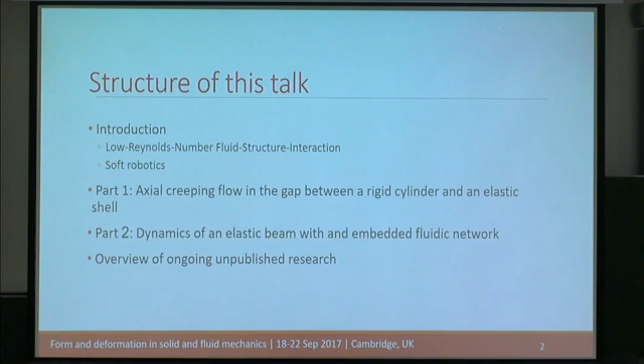In the last part, I'll present some ongoing unpublished subjects and ideas that I'm working on.

Let's assume you have a problem involving a fluidic domain and a solid domain. All of these configurations are governed by conservation of mass and the Cauchy momentum equation. For a fluid, assuming it is Newtonian, you substitute the Newtonian constitutive relation and get the Navier-Stokes equation. For a solid, assuming it's Hookean, you substitute the Hookean constitutive relation and get the Cauchy-Navier equation.

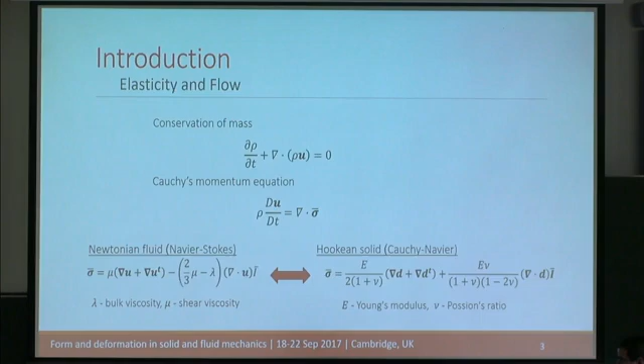So it is clear that for solids, the stress is a function of the deformation, while for fluids it's a function of the velocity, which is the time derivative of the deformation. Thus we get a new time scale: the viscous elastic time scale, proportional to the ratio of the viscosity of the fluid and elasticity of the solid.

This time scale defines the viscous elastic transient dynamics, and in general these problems are governed by some sort of parabolic diffusion equations. It's interesting to know that you can get in these systems very fast creeping flows.

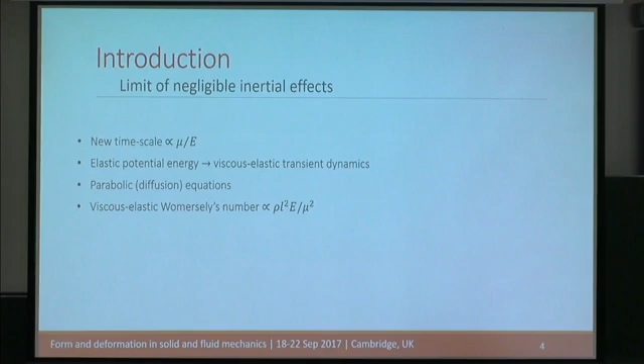You can see here the relevant Womersley number. So if you have a very viscous liquid and a very stiff structure, viscous elastic dynamics can in fact be very fast while still keeping creeping flow.

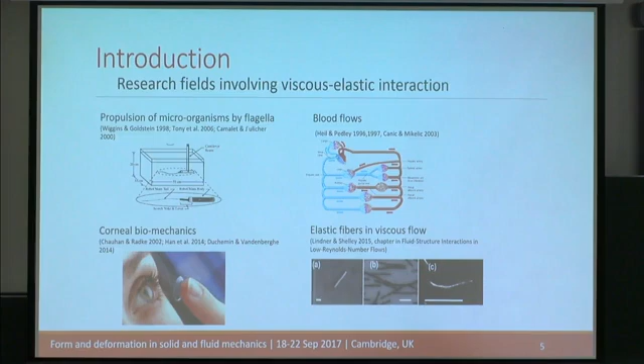Viscous elastic dynamics is relevant to many fields of research. The two most prominent ones are microswimmers as well as blood flows. There are other studies in biomechanics.

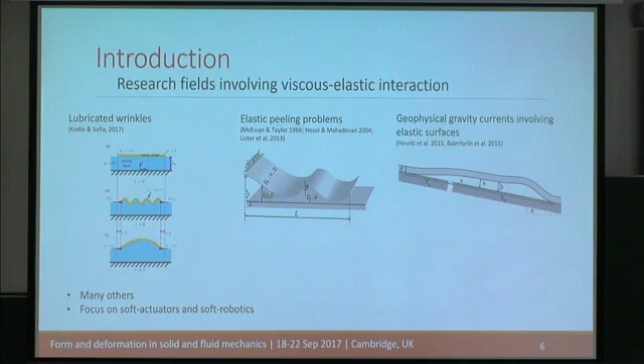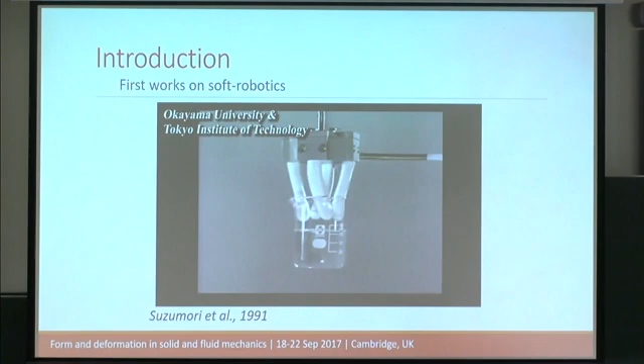The first works on soft robotics were done by a Japanese group headed by Suzumori in the early 90s. They actually did very nice experimental results, and these actuators are operated by pressurized fluid, but it didn't catch on.

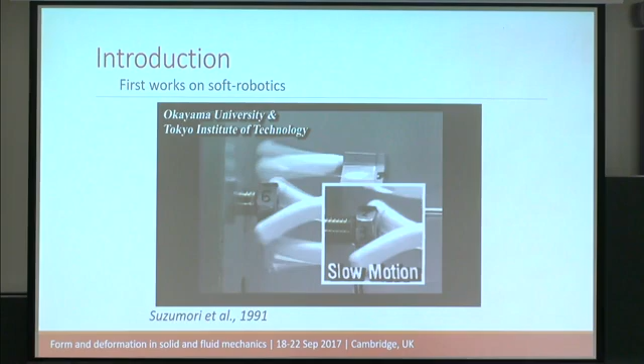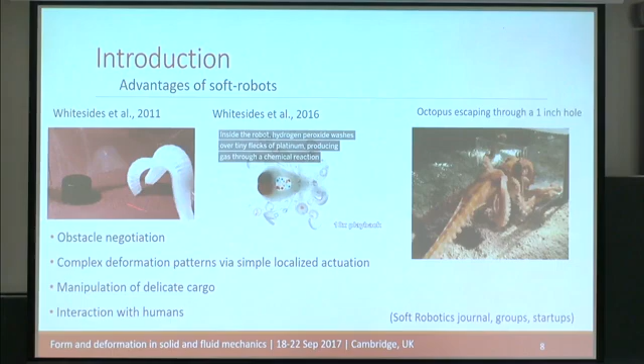There was no interest in this field until a few years ago, when Whitesides started working on the subject. You can see here, I think, the first work by Whitesides showing a soft robot.

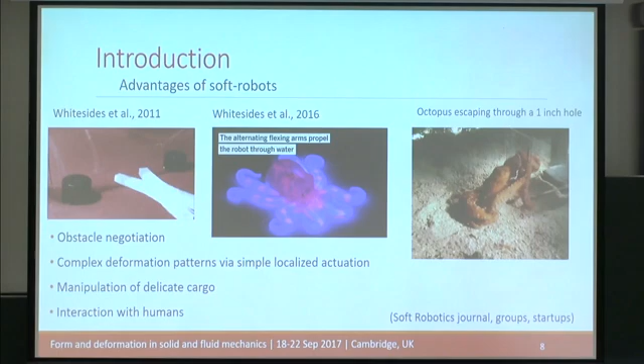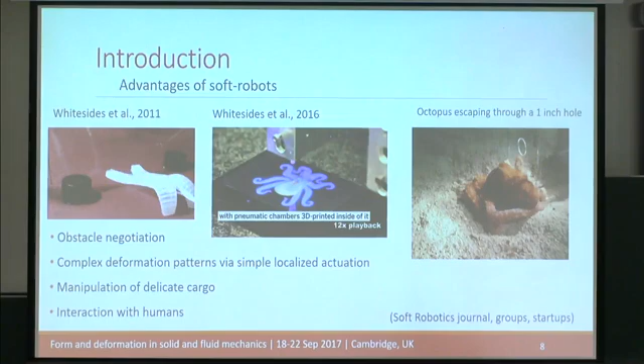This is a more recent work by Whitesides' group, where you have a soft octopus-like structure with complex interconnected channels and chambers, and actuation is done by a chemical response which increases the pressure of the fluid, thus deforming the solid.

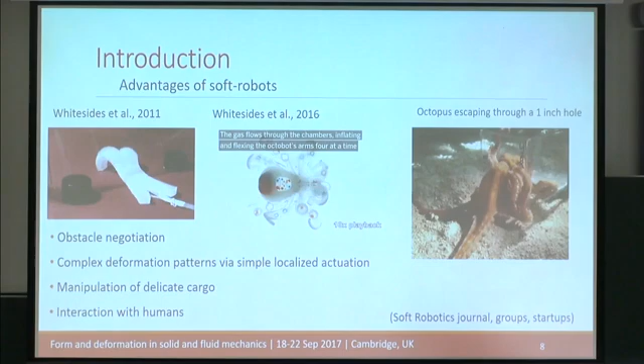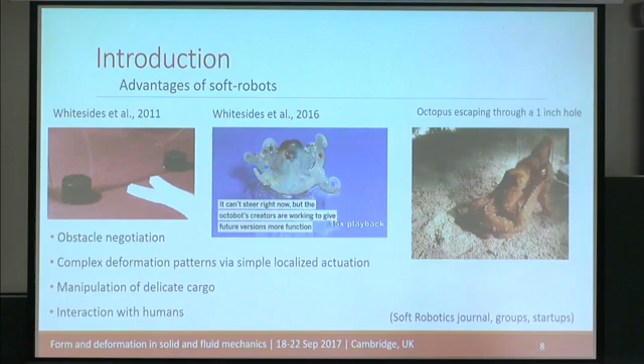The field of soft robotics promises maybe the opportunity to create robots which have superior obstacle negotiation. You can see here the amazing thing that this octopus does. So soft robots may have some of these abilities.

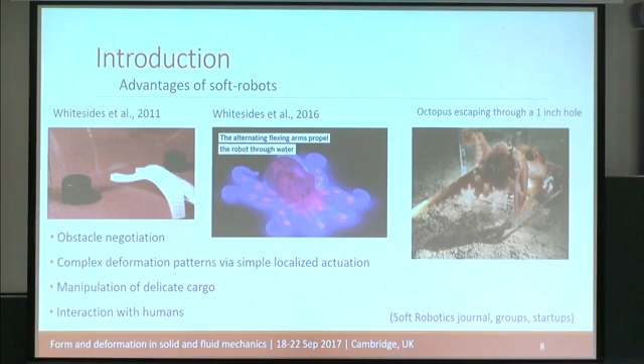Specifically, if you're talking about a fluid-based soft robot, you can achieve complex deformation patterns by actuation really in some kind of localized location, creating complex deformation with simple actuation. Also, the simple fact that it is soft allows manipulation of delicate cargo and direct interaction with humans. In general, currently, this is a very, very active field.

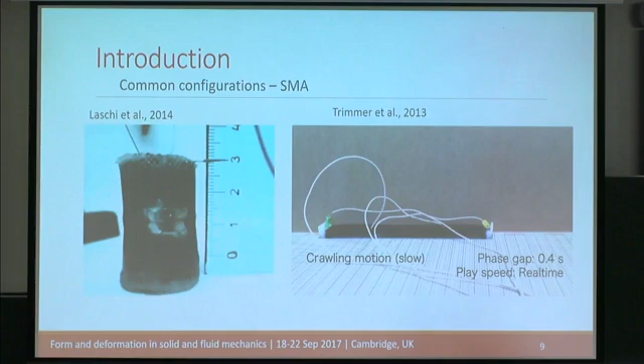A note: in this talk I will talk only about fluid-based soft robots, but there are other methods. Maybe the most common one is shape memory alloys, but we will not focus on this. We will focus on...

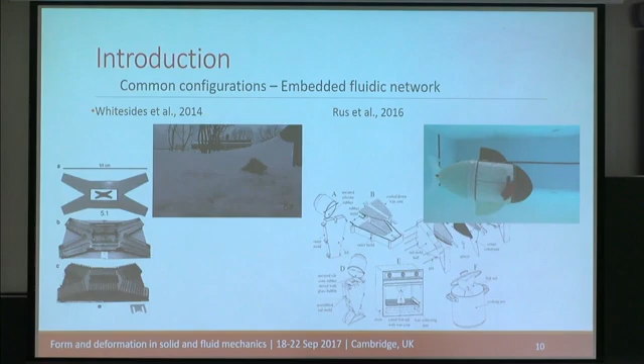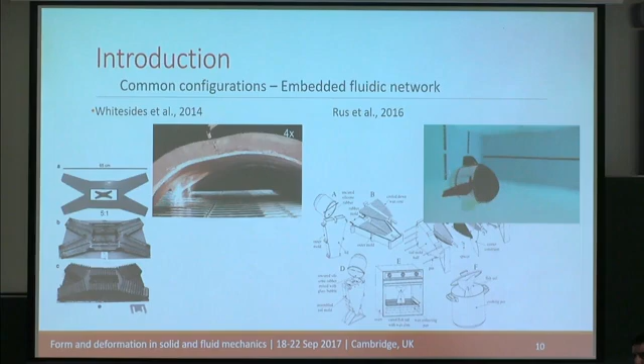Fluid-based soft robotics are in general constructed of some kind of combination of internal cavities and channels which are connected, and are pressurized or actuated by some sort of syringe or pump or chemical response, and deform the surrounding solids. And when you look on this, the question is, how would you model this?

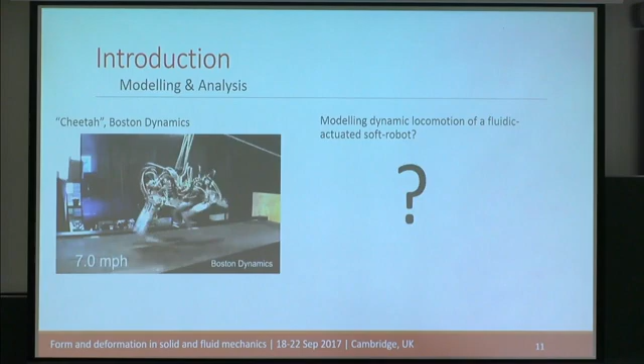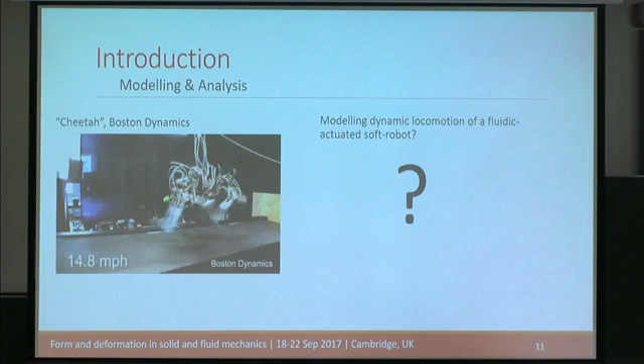So here we have a rigid robot, and I guess it's not simple to model this thing, but still you have a finite number of degrees of freedom. You can build a matrix and so on. But how would you model a soft robot?

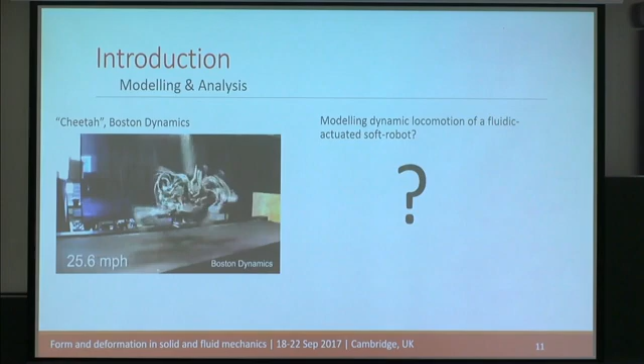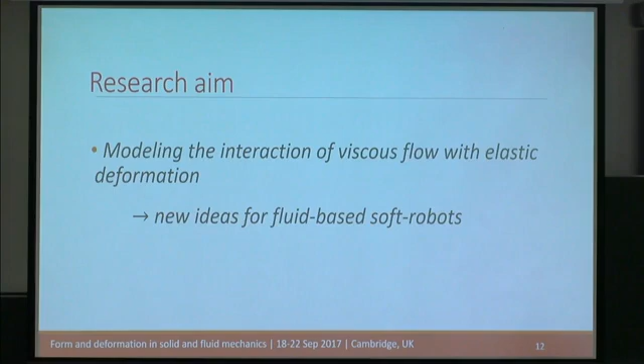How would you model a soft robot actuated by internal fluids with inertia, etc.? This is a bit more complex, and this would basically be the goal of this project: to model viscous elastic interaction and try to get new ideas and make a better soft robot.

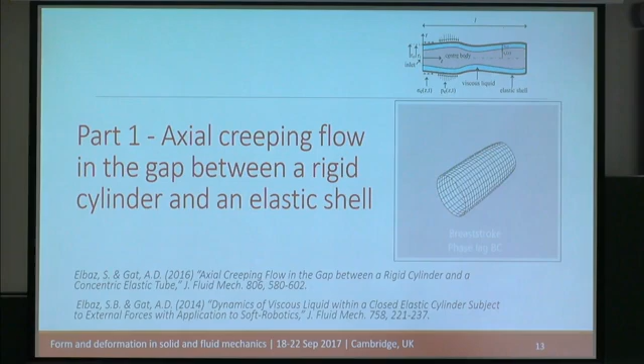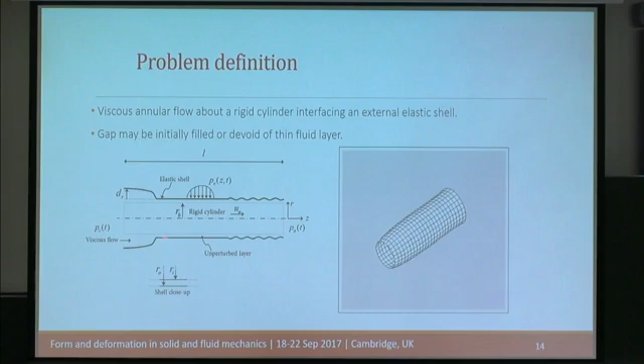So I'll start with the simplest possible configuration: just flow through an axial slender geometry. So we have an internal rigid cylinder which may move relatively to an elastic external shell. And we introduce fluid into the gap between the rigid cylinder and the elastic shell.

This is already a significant simplification. We can further simplify this by assuming that the deformations created by the flow are small compared with the initial thickness of the fluid layer between the rigid inner cylinder and the external elastic shell. This ratio is described by lambda h here, which is H0 divided by dr star. H0 is the initial gap, dr star is the deformation that we create.

In this limit, we linearize the problem and we'll get a linear diffusion equation, which can be solved, and we'll obtain the deformation dynamics. This is not what I'll talk about today.

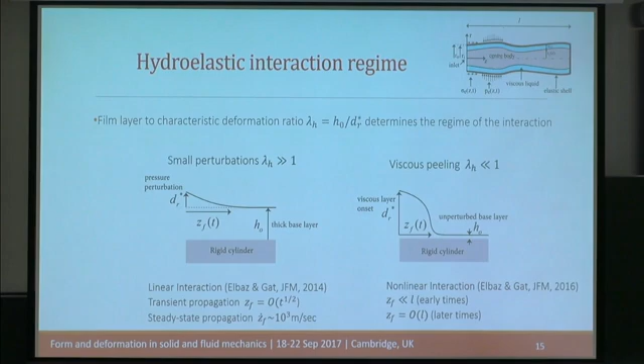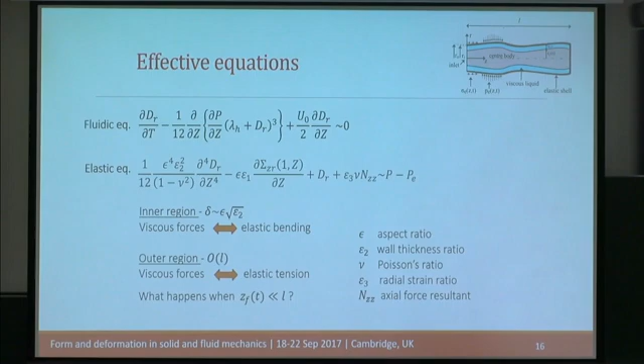We also have an elastic equation which comes from the thin shell approximation, where this term is related to elastic bending, and it's multiplied by a very small number. This suggests the existence of an inner region and an outer region. So we can solve for the inner region, and we get this equation.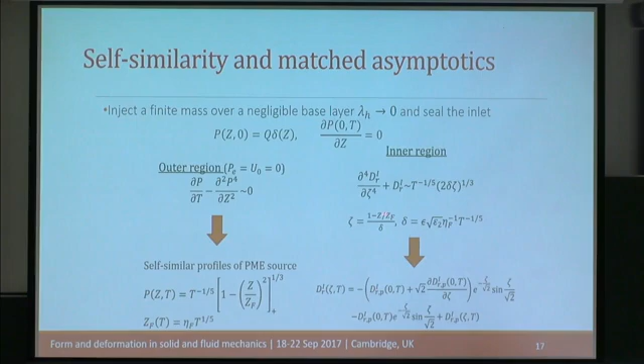So there is a discontinuity, and this discontinuity would obviously create a boundary layer to correct the infinite jump in dr, in the derivative of dr. So we can also solve the inner region, and we can then connect them asymptotically, get a uniform asymptotic solution, which basically describes the front.

And we can see here the outer solution, the inner solution, and this is the uniform solution, and we have a moving boundary layer which propagates as the fluid propagates into the elastic cylinder.

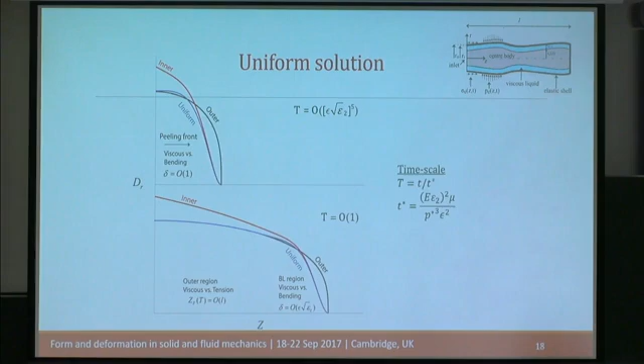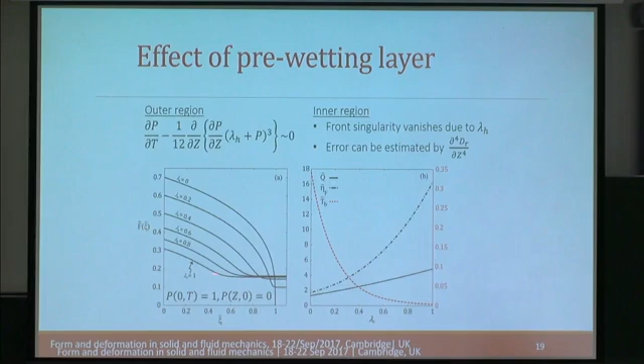We can also solve for intermediate values of lambda h, meaning that the deformation is not very large or very small compared with the initial gap. In this case, we don't have exact solutions. We still have, though, self-similarity, and we can solve an ODE numerically, and we can see here that as lambda h increases, the discontinuity of the front vanishes, and eventually there will be no boundary layer. So this would be a sufficient regularization.

Okay, so we can now maybe try to use this to design deformations. If we look on the characteristic time scale, T star, it is inversely proportional to the characteristic pressure to the power of 3. So if we have advection in the system, if we have relative motion, we can basically create impulses moving within the system and separate them by regions of very small gauge pressure.

The very small gauge pressure will create a very large timescale, so information will not be transferred through the different pockets. This allows us to create signals of the deformation propagating.

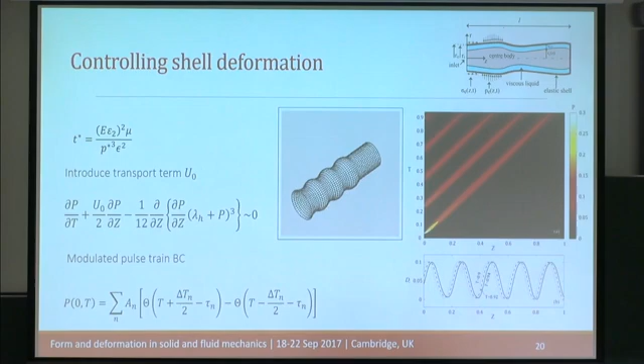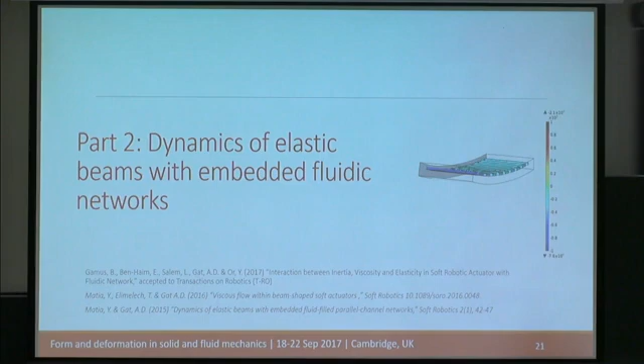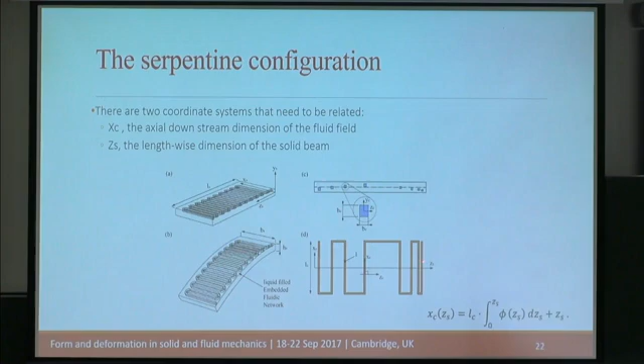Let's try to model a more realistic configuration, since soft robots don't really look like a cylinder. Here I'll talk about an elastic beam. This is a slender elastic beam with its own coordinate system, ZS, XS, YS, and within it there is a serpentine slender fluid-filled channel, with coordinate XC, the streamwise direction. Due to some asymmetry, when you pressurize the channel, you create deformation of the elastic beam.

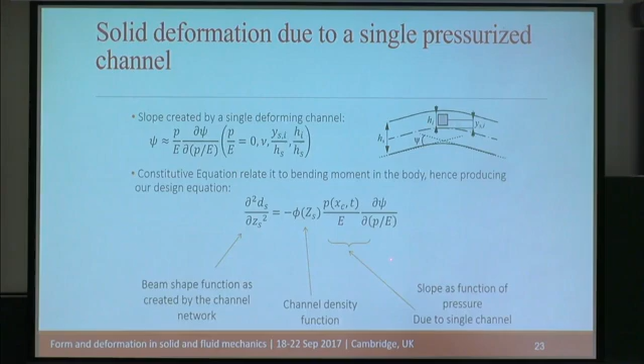We can get the effect of a single channel by numerics or experiments, then use long wave approximation and obtain an induced curvature of the beam as a function of the density of the channels and the effect of a single channel, which is related to the pressure within the channel.

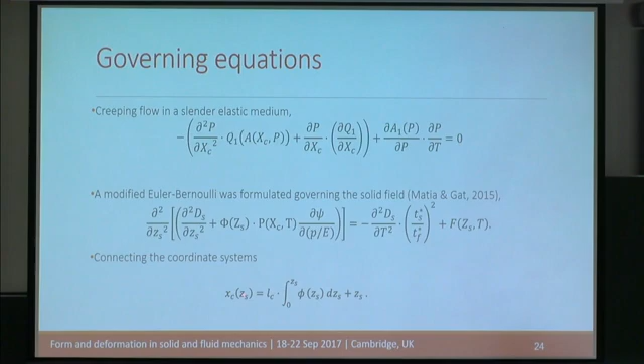We also need a third equation, simply a conversion of coordinates from the beam coordinate to the streamwise coordinate of the fluid. We can combine these three equations to get a fourth-order linear partial integro-differential equation.

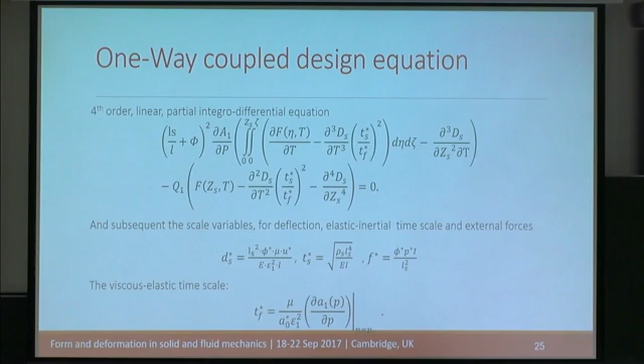We can solve this equation for various cases and try to understand what the dynamics of the system would be, and try to design the deformation patterns.

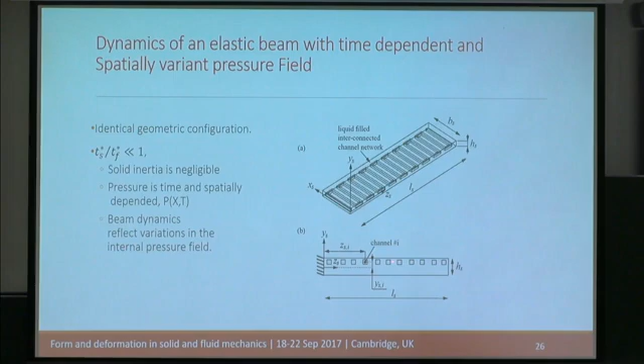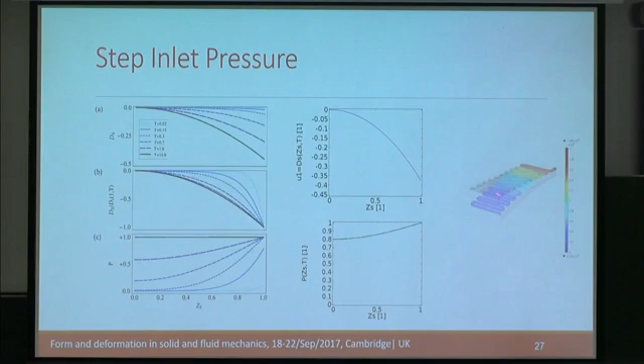In the limit of negligible solid inertia and uniform distribution of channels, where channel properties are constant, we can solve for a step inlet, for example, and see that initially the deformation is limited to a small area near the front.

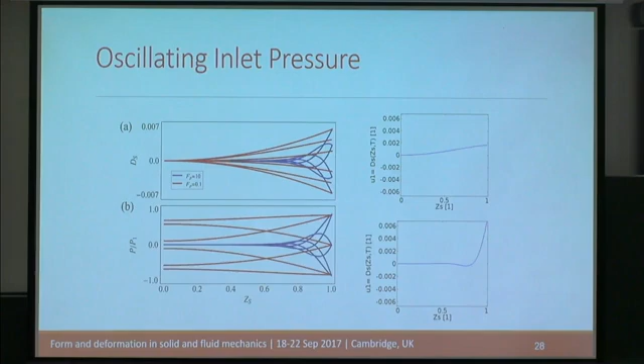We can also see that actuation by a sinusoid with a period much larger than the viscous-elastic timescale would create deformation of the entire beam, whereas actuation by a periodic sinusoid with a period much smaller than the viscous-elastic timescale would create only part of the deformation.

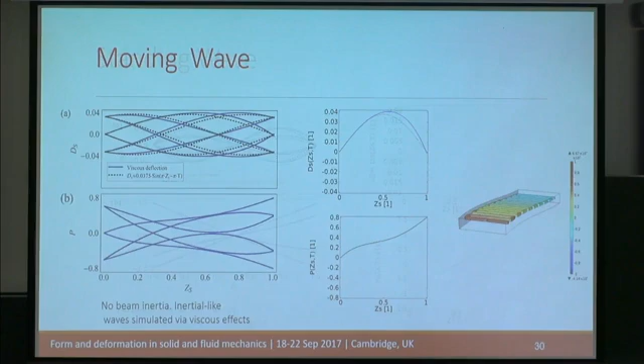We can also create a standing wave without inertia in the solid, or a moving wave, etc. So we can use this to design what kind of deformations we want.

Now I would talk about a subject that I currently work on in my group, and the first thing is the immediate continuation of this published work.

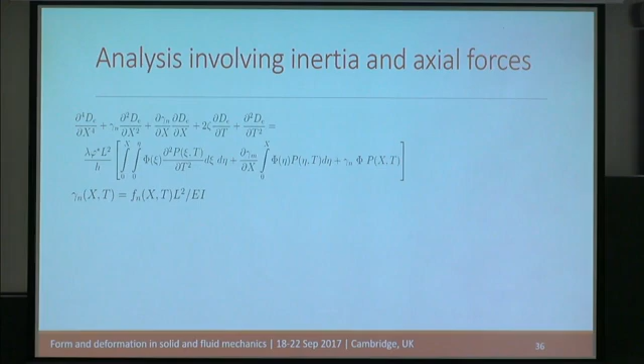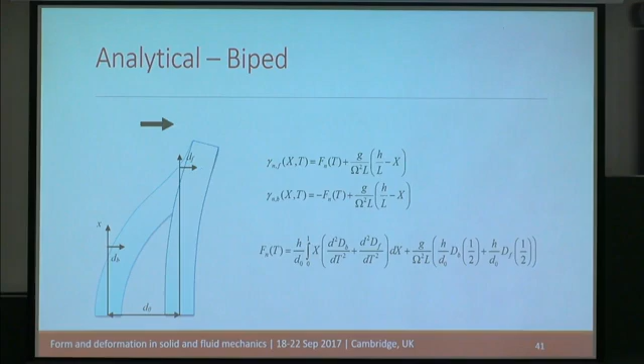We want to model a dynamic locomotion of a soft robot composed of two legs. I don't have time for this, I'm sorry. Basically, we need to include axial forces acting on the legs, and we're currently working on modeling two soft actuators trying to run with dynamics and inertia and contact with the floor, etc.

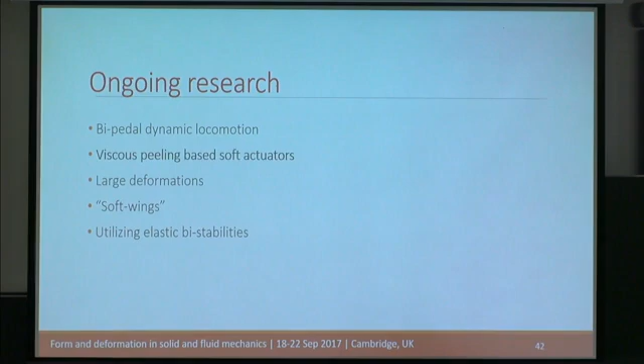Another idea is to use viscous peeling to create a simpler soft robot. Earlier I showed you the characteristic way to make soft robots: you need to create a structure with complex internal cavities, then fill these cavities with liquid or air and try to actuate them.

But you can also do something much simpler: just print an internal structure. In this case, we printed a serpentine channel, then immersed it in a polymer, let's say PDMS, and got this composite structure, with an internal solid material contained within an external soft material.

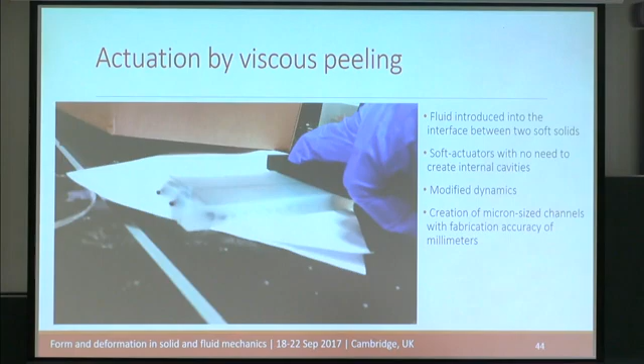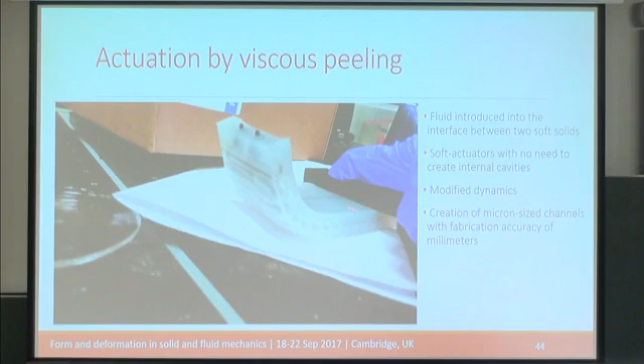Actuation can then be created simply by introducing flow at the interface between the two solids, which significantly simplifies the fabrication. You can also see here beautifully the propagation front—this is what we saw in the peeling problem in part 1.

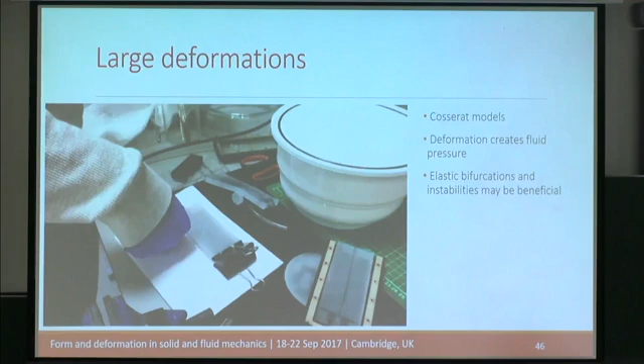Another problem is to study large deformations of such structures, which requires using a Cosserat model, and also involves creation of pressure within the channels by external forces acting on the solid, which also needs to be modeled.

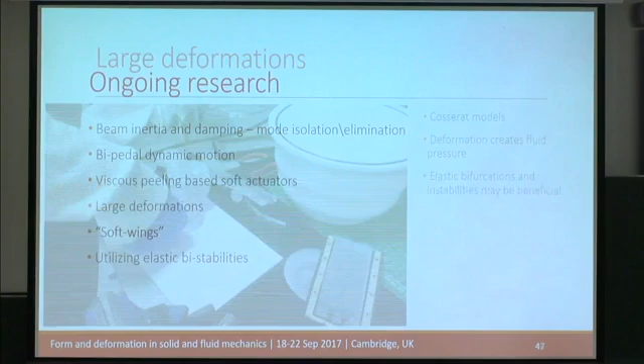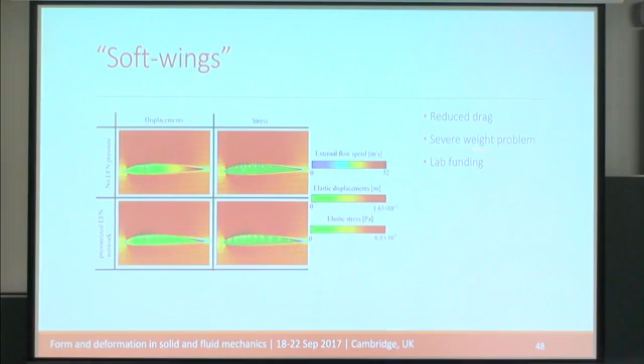We are also trying to apply the same idea from soft robotics to soft wings. This is within the field of aerodynamics, creating a wing that deforms continuously, significantly reduces drag, and allows better performance. But the problem here is that we need soft actuation that is very light.

The last subject I'll talk about is using elastic bistabilities to control the deformation of a complex soft robot. Let's assume the different actuators are just balloons. We have three balloons connected by rigid channels. Some materials have this constitutive relation between pressure and radius: initially a Hookean relation, then a maximum, and then, due to material nonlinearities, enhanced rigidity again. So if you're operating at a pressure of 35, for example, you have three points, and the middle point is unstable, so basically there are two possible solutions to this system.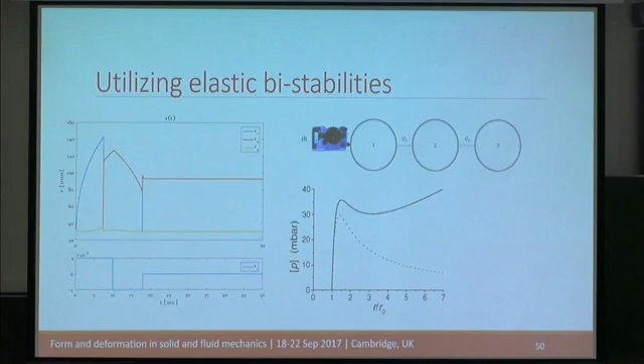By applying a certain signal at the inlet, we can control this: the blue line is the radius of sphere 1, the red is the radius of sphere 2, and yellow is sphere 3. We can initially inflate the first balloon, then the second balloon, and then deflate only the first balloon. Then we can choose which part of the robot we want to inflate, and this is for free. We're now trying to do this for n balloons and get n degrees of freedom from a single actuator.

So basically, modeling of viscoelastic dynamics allows us to better control the deformations created in soft robots, and the introduction of fluid dynamics to soft robotics is hopefully a subject that is open to new ideas. Thank you.

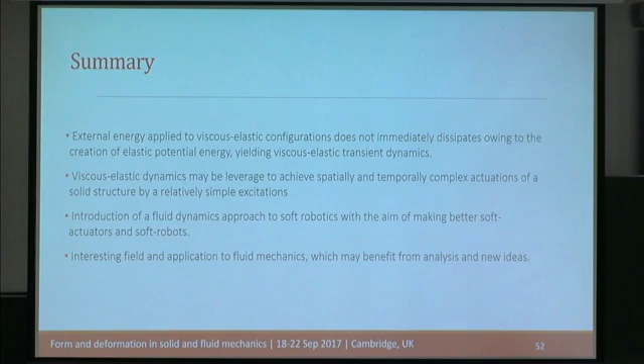In your system with the serpentine, how do you introduce the fluid? So there is a Luer connector. Actually, I don't know, a student did that part. You need to create a tube that comes out of the rectangular beam, and then create a connection between the outside and the material. You don't connect the tube to the rigid part, but to the soft part, and then pressurization peels the two solids apart from each other.

What role does the serpentine play? Does it have an important mechanical role? We need an asymmetry in the location of the channels compared to the neutral plane, otherwise it won't bend. If you're able to make empty channels inside the polymer, it should work. Yes, that's a trick to make the channel.

Quick question: in terms of practically making a self-contained autonomous robot, where or how does one actuate it? Where do you supply the input?

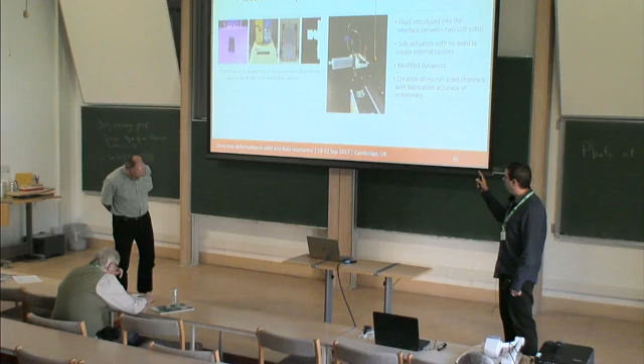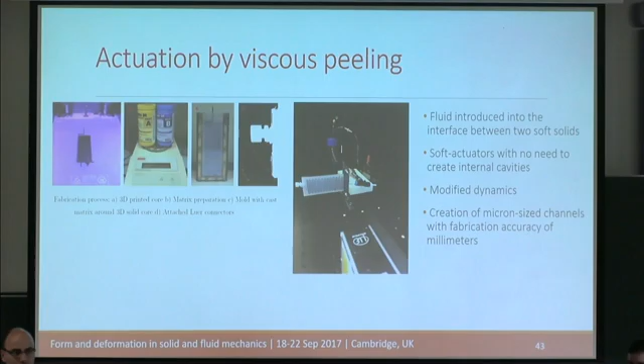Well, this might be a benefit of viscous peeling, because usually they use gas, and when you use gas, you can't use a syringe since you need to introduce much more volume than the network requires. But if you go from solid to liquid, you don't have to worry about bubbles in viscous peeling—you just need to actuate a syringe. In general, yes, this is a problem, definitely with gas, less so with fluids. An incompressible fluid has an advantage because you only need to introduce the amount of fluid required to inflate the channel. Thank you again very much.